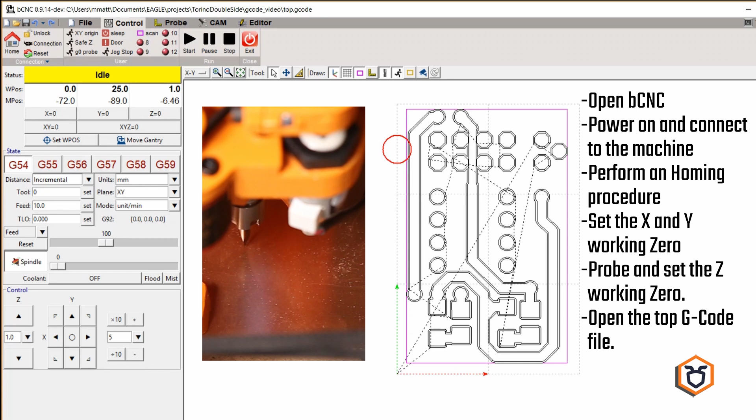Notice that we are using the new head with the pre-connected probe cable. In any case, remember to connect a probe terminal to the surface of the board, and if you don't have the pre-connected probe cable, you need to connect the second probe terminal to the bit before every probe and auto level operation.

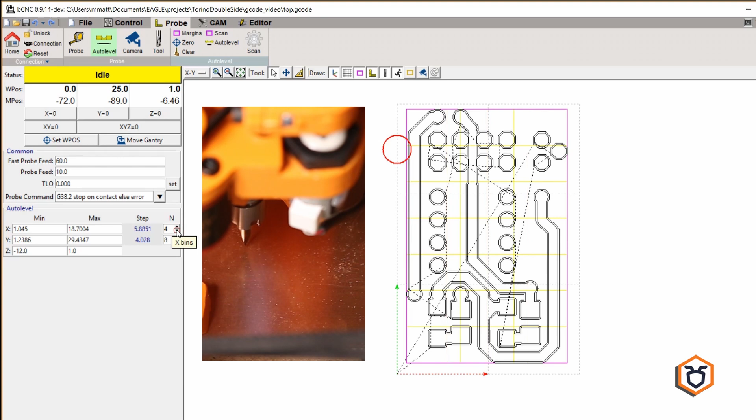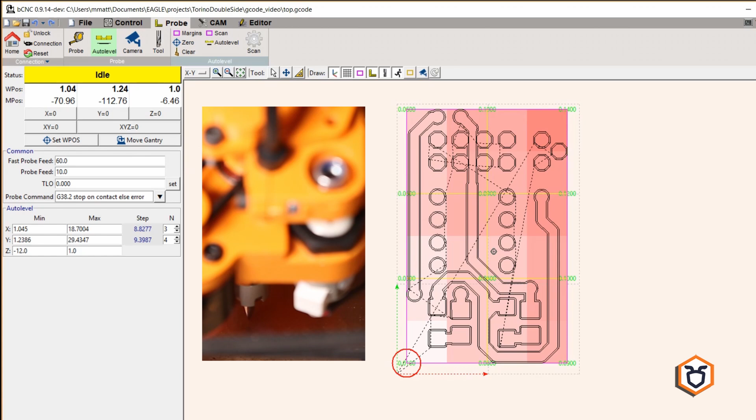So, from this point we get the margins, set the grid spacing and launch the scan procedure. Set the Z-axis to 0 again at the center of the grid and also set the 0 of the auto level. Then we are ready to launch the milling procedure.

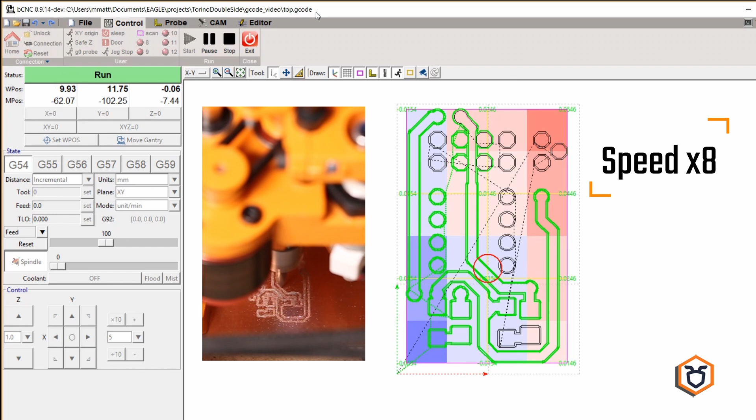When the milling procedure is done, we are ready to make the alignment drill. But first, a tool change is needed to insert the drilling bit. As a consequence, we perform a new probe to set a new 0 of the Z-axis and we load the top alignment drill G-code file.

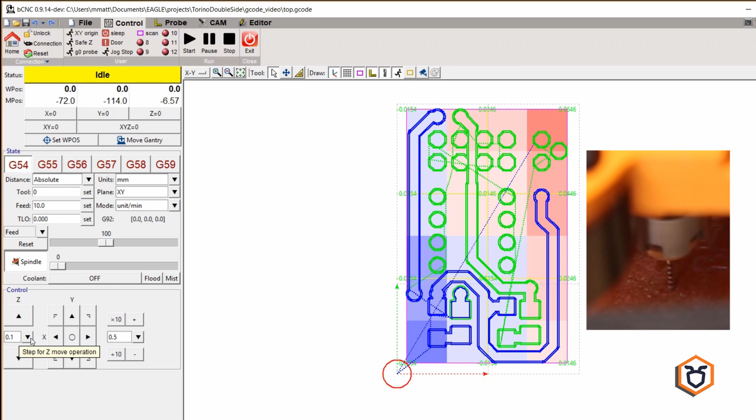When you load the G-code file, answer no to every question, so that the bed level information is retained. Launch the alignment drill.

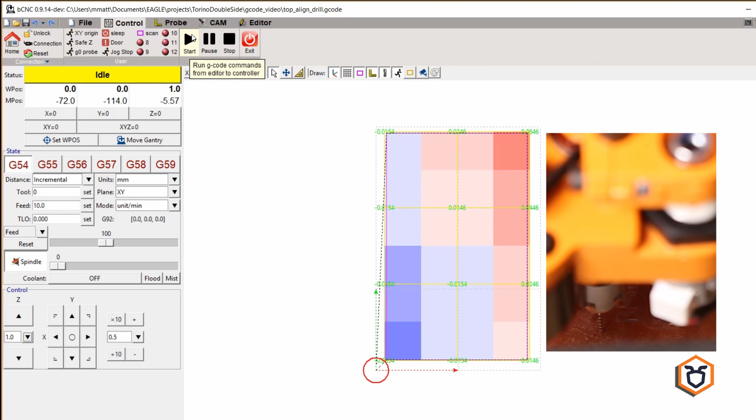bCNC needs to know the offset between the tool and the camera to perform an optical alignment. This operation can be executed using an existing hole or drilling a new hole on the board. In this case, we show the offset calibration on an empty board. We drill a hole on the XY0 working position.

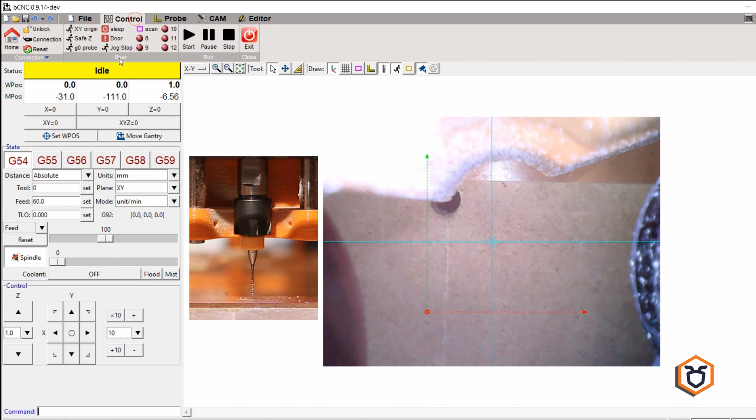At this point, we mark the position of the spindle in the probe camera panel. Then we turn on the camera and align the center of the crosshair circle to the center of the hole.

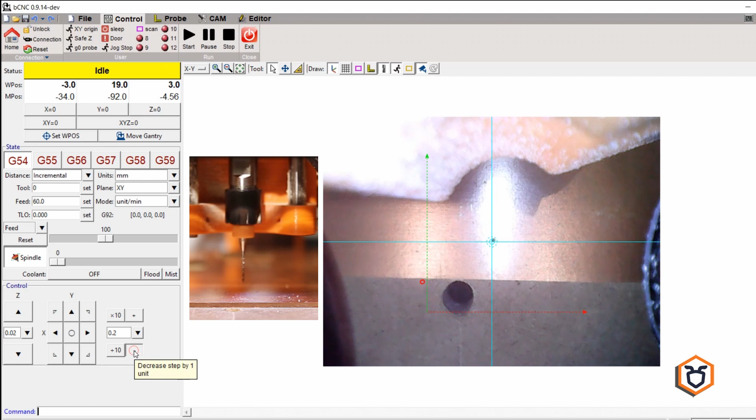At this point, we mark the camera position in the probe camera panel. To always obtain the maximum precision, we suggest executing this operation before every optical alignment.

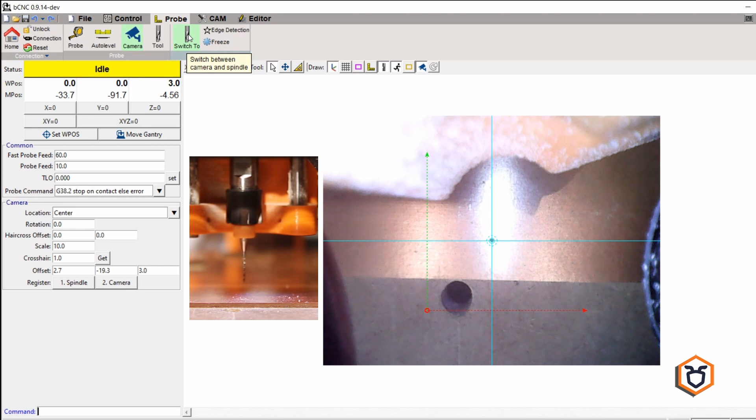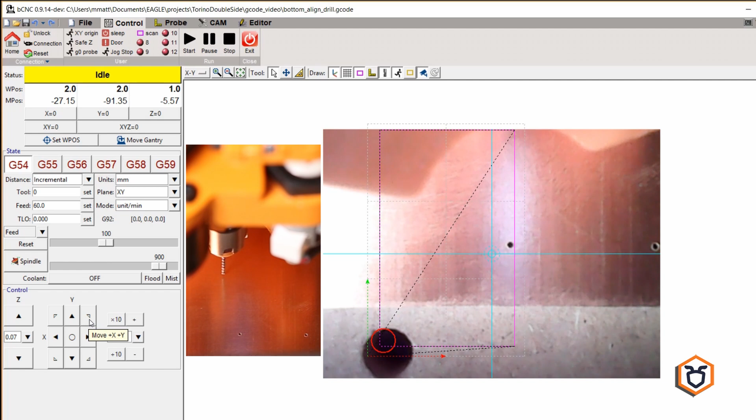This phase starts after turning the board upside down and loading the bottom align drill G-code file. We switched on the camera and we go in camera mode pressing the button Switch To in the probe camera panel. As stated in the previous video, we will use the alignment drill to obtain the rototranslation information to orient all the bottom side G-codes. To do this, for each hole, we align the crosshair of the camera with the center of the hole.

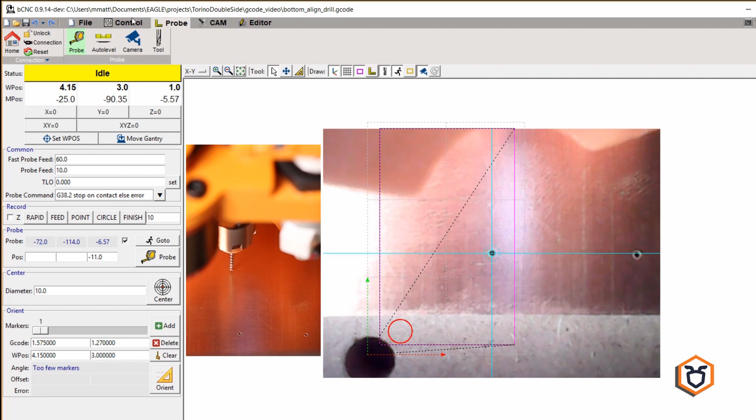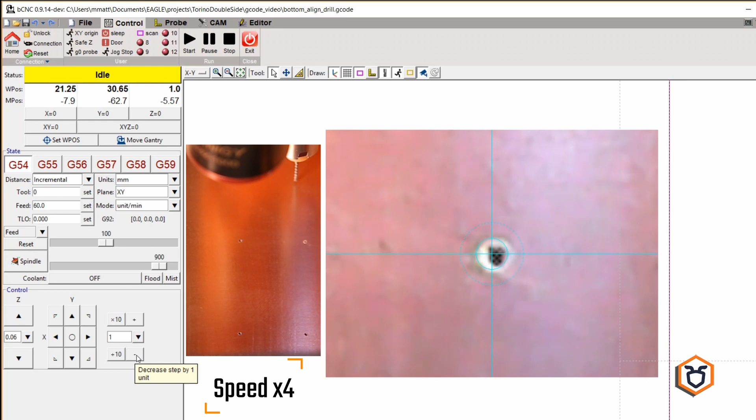Add an alignment point to the probe panel and click on the relative G-code point on the screen. bCNC automatically snaps on the nearest point in the G-code. At the end, the rototranslation information is calculated and stored in bCNC.

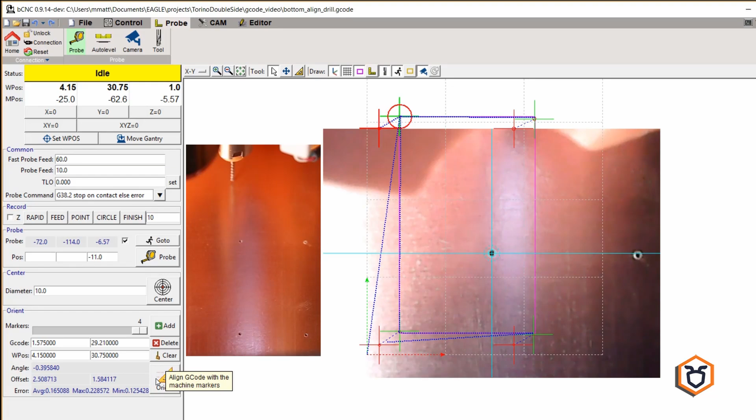At this point, we need to perform the auto level on the bottom side, and we load the bottom profile G-code just to do that. As you will see, it's the same procedure made on the top surface, but preceded by the G-code alignment that is executed by pressing the orient button in the probe panel.

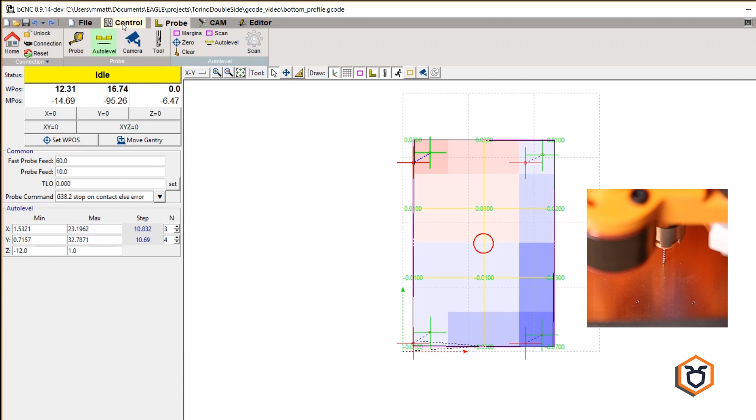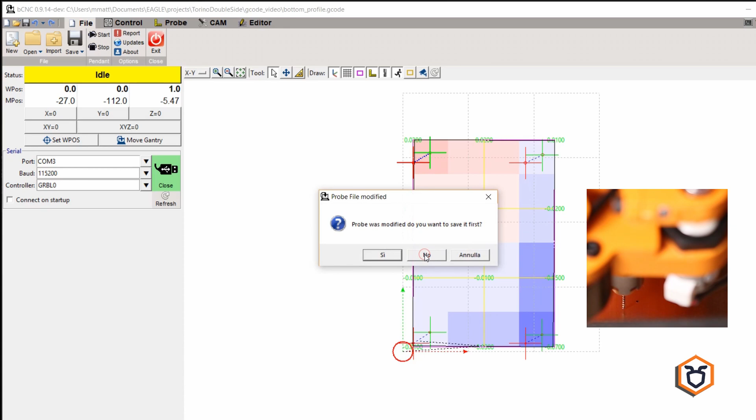We load the bottom drill G-code. Press the orient button and start the drill operation.

After a tool change to insert the milling bit, and after having zeroed the tool, we load the bottom G-code file, press the Orient button and start to mill.

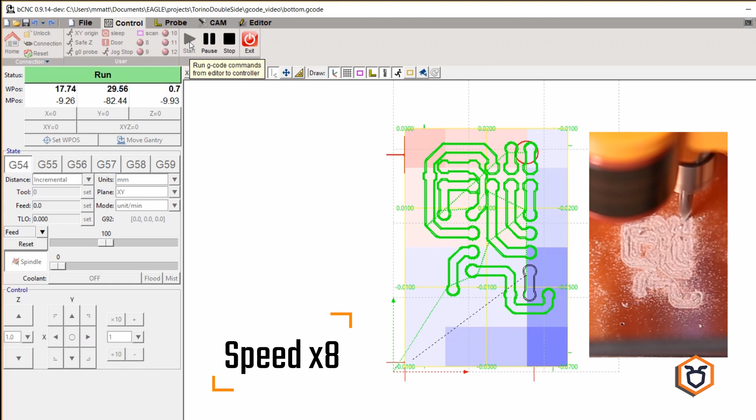The last operation we execute is the board profile cut. As usual, we change the bit with an appropriate one, set the tool 0, load the bottom profile G-code file, press the Orient button and then start the cut operation.

After the whole process, this is what we obtained. It may be necessary to use some fine grit sandpaper to brush it lightly to remove the burr. So guys, we showed you how to make this kind of circuit, but it's not the only way.